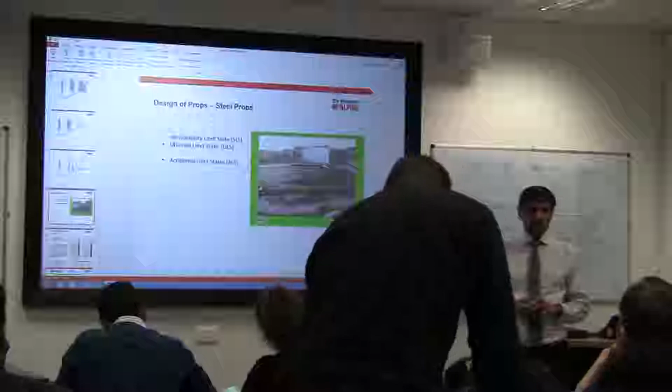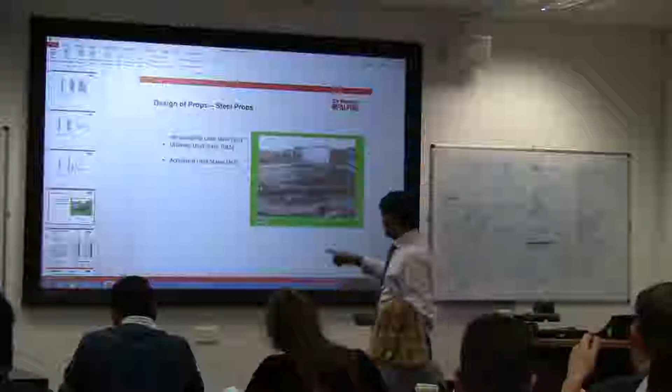That means how much this fly-through prop is going to sag. Let's say this is going from one end to the other, about 35 meters. Imagine you've got a tube held at two points, 35 meters long. It's going to deflect by its own weight, self-weight.

The self-weight deflection of that prop is going to pull the walls in, because if you've got a basement of, let's say, 40 meters by 40 meters, and you put a fly-through prop like this, that's the plan. So that prop, supported by a capping beam there and there, is like a simply supported beam.

Under the self-weight itself, it will sag. So what happens to that deflection? When that prop deflects, it will pull the walls in. So you've got to think, what happens to the serviceability state during construction of that prop? What is the self-weight deflection? That prop is roughly about a ton per meter, so a 40-ton beam is standing.

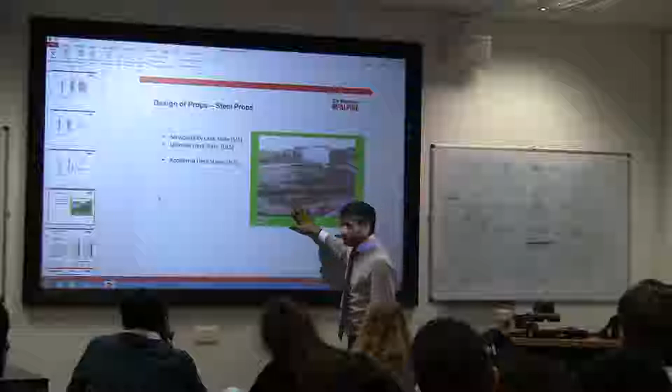When you install it, the ground is there, and you're going to dig underneath it. Once you dig, it starts to deflect by its own weight, and once it deflects, it will pull the walls in. So serviceability limit state is about what is the deflection of that prop.

If a fly-through prop is very large, what we do is we jack it up, so we hold it up. When we install it, we hold it and put it up like that. When we release it, when we dig the ground, it comes flat. So there are two ways of controlling if the deflection is too large.

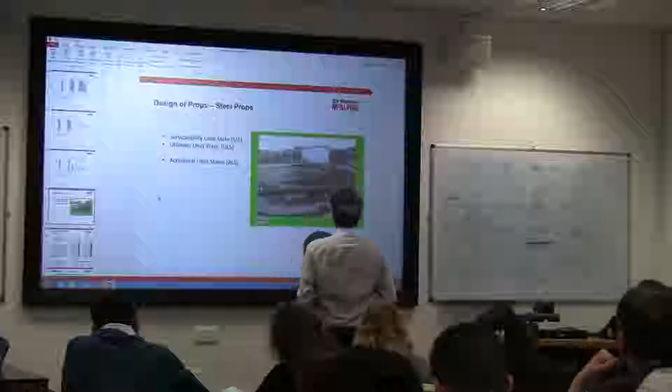And to realize the forces in this, it takes a bit of time, we know that. If it is gravel, you can see, as soon as you dig behind the wall, it will push - the forces act very quickly. If it is clay, it will take a bit of time to build up the forces at the back of the wall. So you have to think in terms of the development of the force with respect to your sequence of construction.

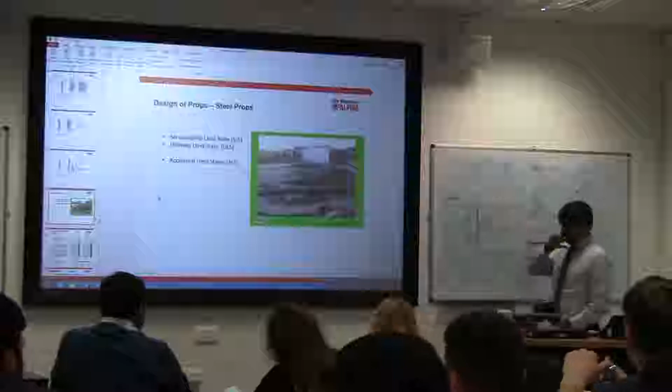So once the force is developed, we also look at the ultimate limit state scenario. That's based on the strength of the material, using material safety factors, load factors, and material factors. We work out what is the force, what is the utilization in these props, how much force is developed in the ultimate limit state. That gives you safety in terms of developing the forces.

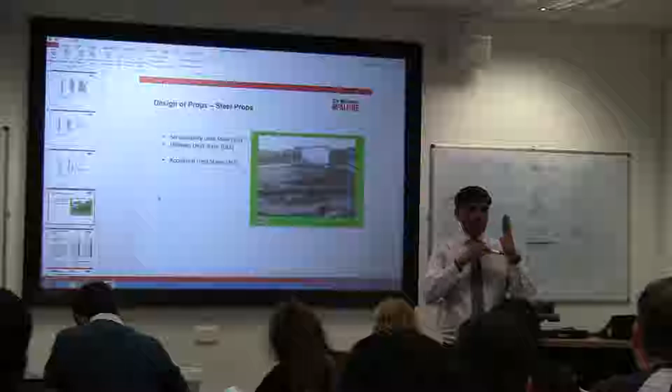Remember, the force in this prop is not developed on day one. It develops while you are digging slowly to the formation level. When you put it in, the force is only self-weight; when you start excavating, the force starts to develop, and it's going to compress this one - it's a strut, so it's a compression member.

You've got to think of buckling, and then make sure these props have allowable stresses - there is a margin of safety in terms of the forces.

So why are they circular props, do you think? Yeah, yeah, yeah, what else? What are the other reasons why it is circular props? Why not a big, massive concrete beam or something? Yep, same way. Yeah, yes. Good point. Any other reason?

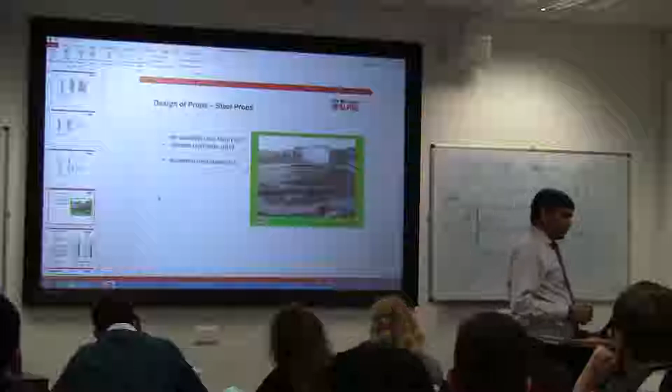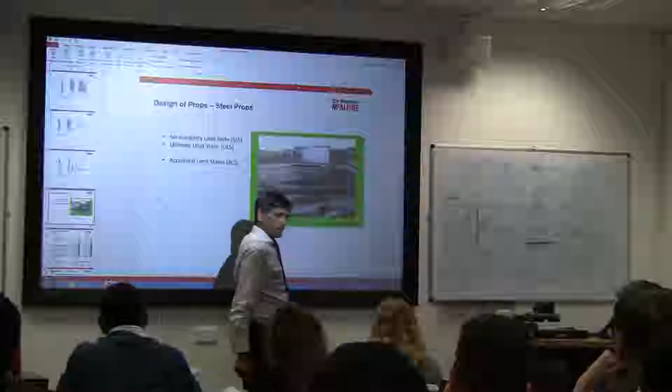In terms of fabrication, in terms of the splices, circular sections give us flexibility to bring the flanges to bolt it. So it's simple and safe to bolt on site. Imagine this is actually about 40 meters - you can see the splice there, the splice there. These splices are easy to install, and you can see clearly that the alignment is easy with circular props.

Also, why do we use sections that are not proprietary? It depends on what the program is. You can go to the market and buy or rent these props, but those props will have limited load. So you can say, oh, I'll buy it off the shelf.

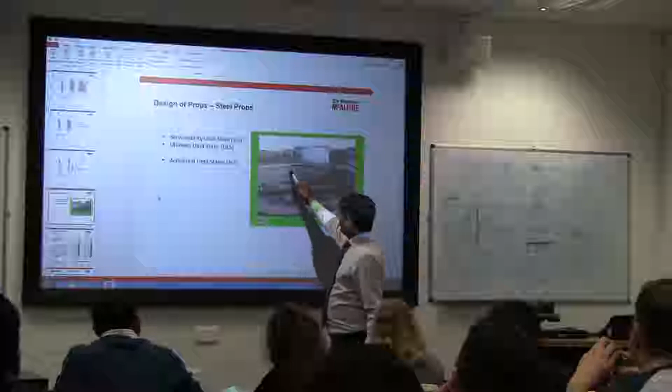I can take a prop which is nicely bolted to my capping beam or whatever waler. If you've got a steel waler, you can see here there is a capping beam, or you could have a steel waler if it's a steel beam. So you can bring in proprietary systems to bolt it and then use it.

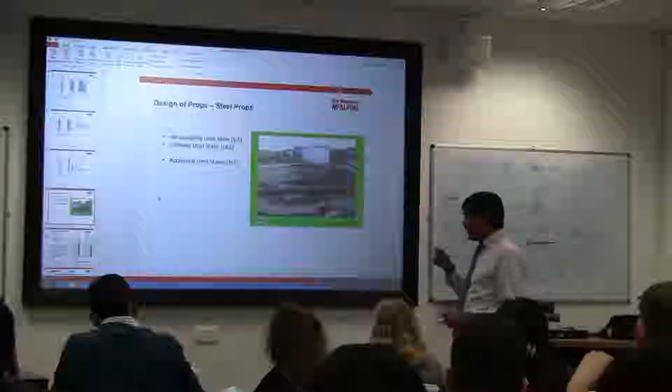If you do a cost analysis, the rent you pay for proprietary systems is very high. You might as well go for props that you can fabricate on site and reuse. Because we are contractors, we reuse the props again and again. That's sustainability—we don't just throw these things away. They go back onto the yard, and whenever there is another scheme, we reuse the props, cutting and modifying them to suit. That's the beauty of these props, when we make them specifically suited for our jobs.

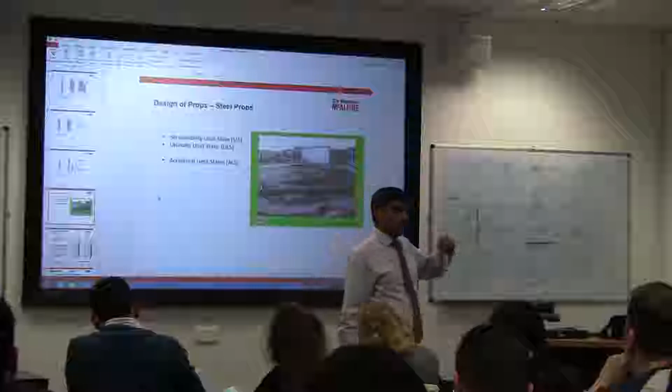Proprietary props also have limited capacity. In this one, the force we're talking about is about 2,000 tons. It's a massive force.

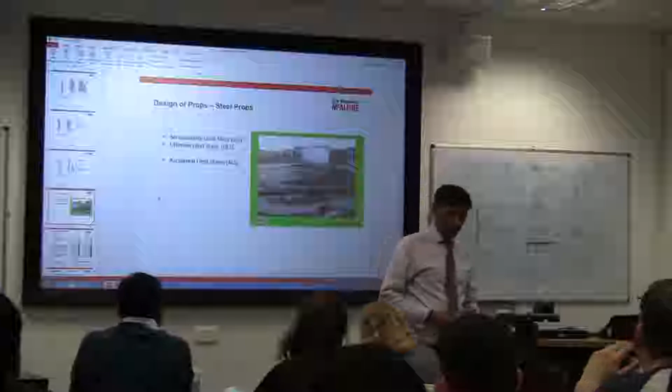What is the disadvantage in steel when you are digging in a blue sky scenario? What happens in summer? It gets really hot, yeah? In this particular scenario, we were working in a blue sky option next to King's Cross Station. This prop gets exposed, in summer, to something like 35 to 40 degrees.

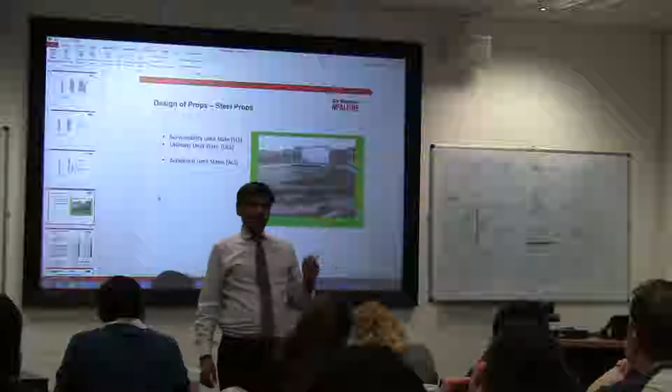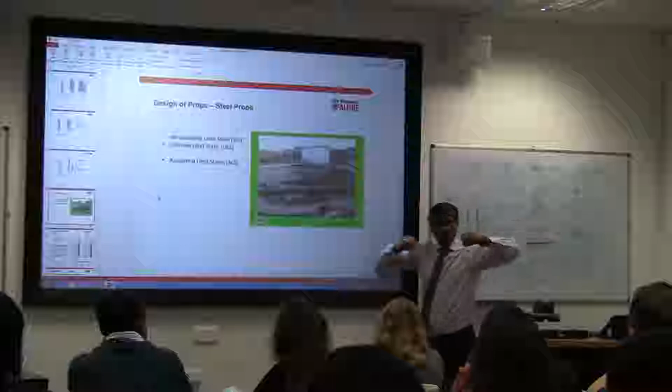So if you put a simple equation of a prop, imagine delta T is equal to 40 degrees, for a prop of length 40 meters. Your delta is equal to alpha T times length—that is your deformation or elongation of the prop. Alpha is the thermal coefficient of expansion for steel, T is the temperature. So you've got a circular prop of about 1.2 meter diameter, and for steel alpha is 12 into 10 to the power of minus 6. We talk about temperature roughly 40 degrees centigrade, with L being 40 meters. It's a huge force.

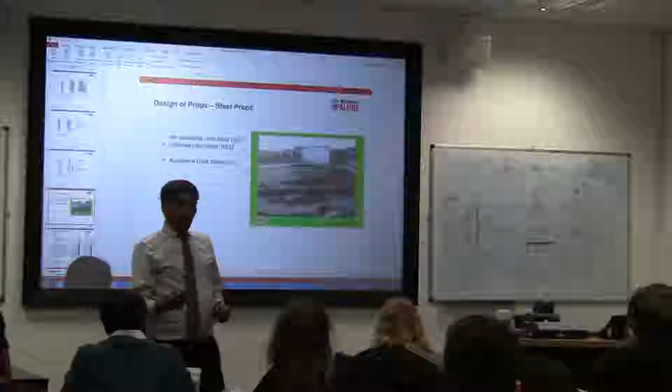When the excavation is going on in summer, the force is huge because of the temperature, restrained by this huge capping beam. So it develops extra force. Remember, it's not nice to freely expand—if you let it expand, it's fine, but you can't let it expand because it's held by those big, thick corbels at the end. So you are developing a huge force in the prop in summer.

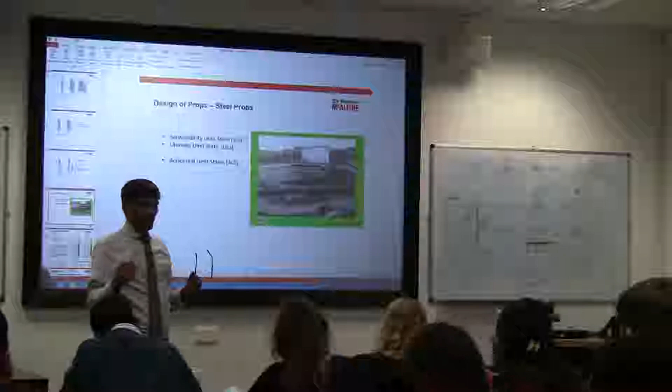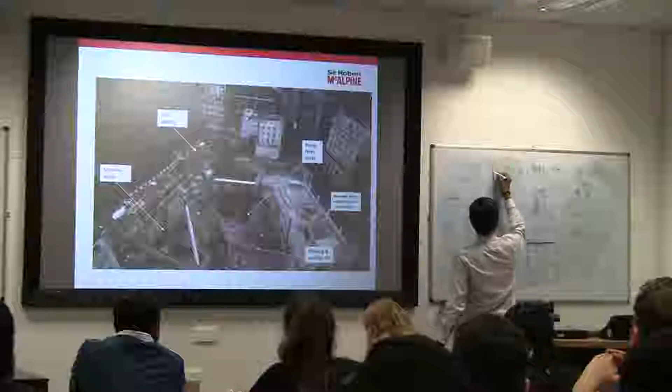Again, it's something we have to think about. One of the things you probably remember—you see what we have done there? You put insulation, because that force is massive and the prop is going to buckle. So what we did was put a lagging outside the prop.

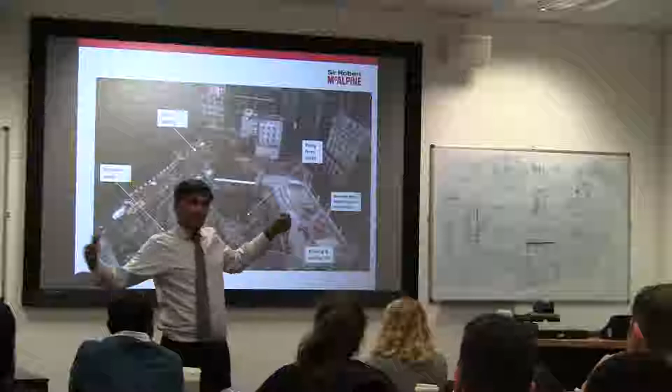To maintain the temperature so it doesn't see 40 degrees. This is again in London. Going through the construction sequence, almost 9 months, we will see hot summer periods, and we want to control the forces in those props. We lag them because they are the longest props on site—obviously, the longer the length, the huger the force development. But if you're short, it doesn't matter because it's very short. This is one of the largest props used in London, a 50-meter long prop.

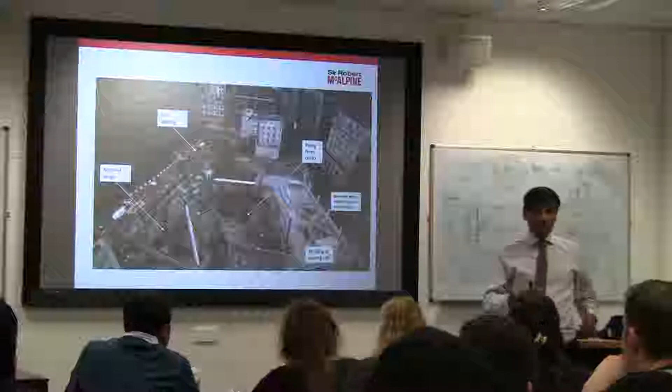You have to think, in terms of ultimate limit state, what temperature force is added onto the prop force. That component—do not underestimate it, it's very huge. If you let it go, it's fine, but if you can't let it go and it's all locked in here, the force will go up.

So the other one is about accidental limit state. What is this accidental limit state? Why should I worry about accidental limit state? Anybody heard about accidental limit state?

When you're holding back water, you may have a ship crash into your structure. I agree, you can have accidental loads. So what is the scenario you can think of here that can create an accident?

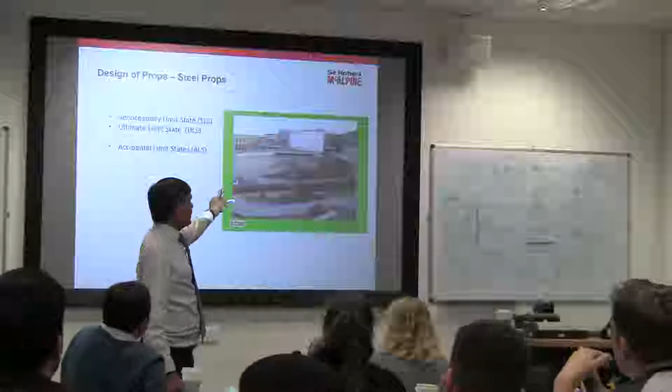Collisions, isn't it? Remember one of the sites I showed you, we have a big tower crane lifting 5 tons of steel, or maybe a cladding or a piece of brick, 1 or 2 tons. So accidentally, if it gets dropped on this, you've got to address what is the force in this and what is the redundancy in the system.

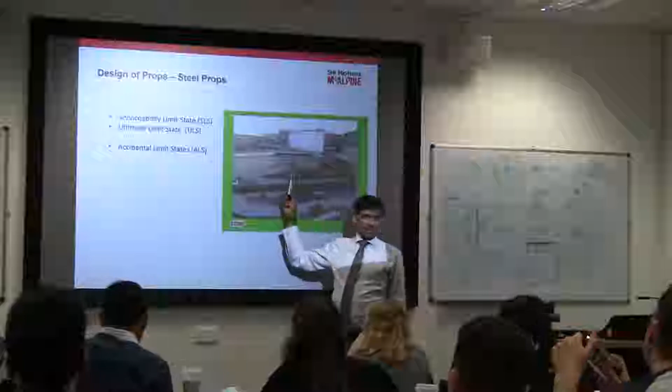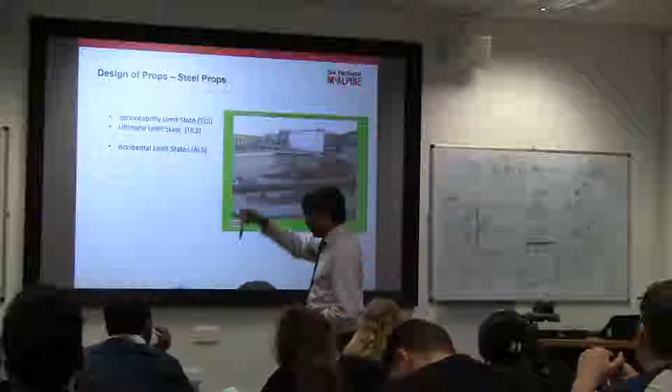Imagine if you've got a 50-meter long prop, and if you drop unfortunately 5 tons, which is 50 kilonewtons, you can see the bending moment dramatically goes up because the prop is long. For accidental impact, you have to think of dynamic impact factor, which is roughly about 2. So static load is 50 kilonewtons, but dynamic load is maybe 2 to 2.5 times that.

So the dynamic load factor times the static load is your force impact applied on top of the prop. In that scenario, you must ensure that there is enough redundancy in the system so the prop is not going to fail, because if that prop fails, the wall is going to come in. Once the wall comes in, there's no going back.

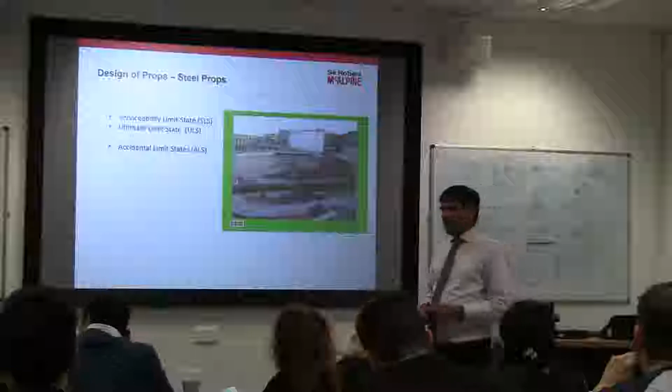So this is another thing that we have to demonstrate: for the props that you are putting, what is the accidental limit state scenario? If one prop fails, you have to imagine there is redundancy in the system. There have been major incidents in temporary works where one prop failed and it's like a pack of cards - everything collapsed.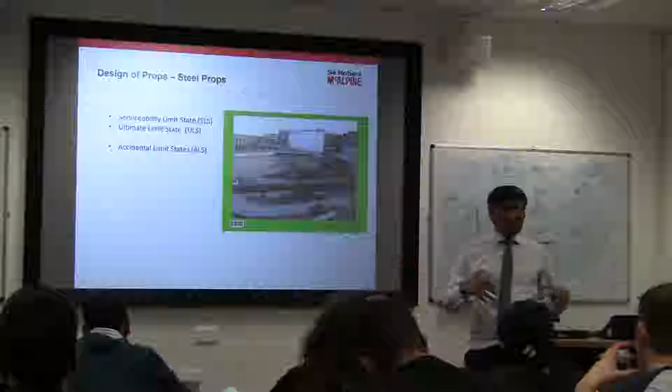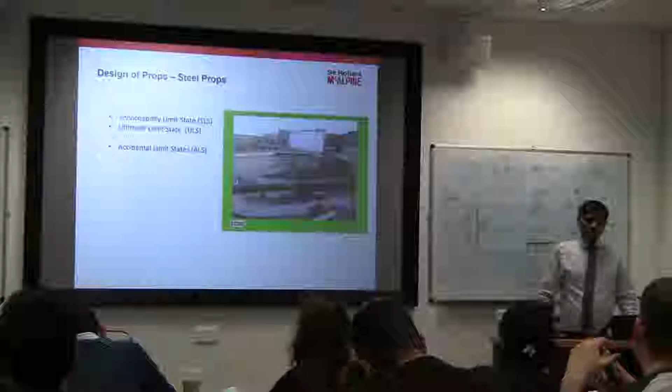And there is no going back, because once the walls moved in, the damage is already done - the whole thing came in. So it is important that you address the accidental limit state in these scenarios. It could be a drop of a concrete bucket, a brick tile, or a reinforcement block on those walls. You must ensure that the redundancy in the system is not compromised and there is enough resilience in the system.

I talked about monitoring. In order to ensure that our predictions are correct - remember in soil mechanics, the predictions are based on a certain number of boreholes, certain number of tests, triaxial tests, shear tests, all the tests that you do in classifying the soil and calculating the engineering parameters - you always get a range, as I was saying before.

You get what is called a lower bound solution, a most probable solution, and a worst credible scenario which can never happen. So those three give you a range of values. It is important that we monitor how the structure is behaving as you are digging, excavating, and building the structure.

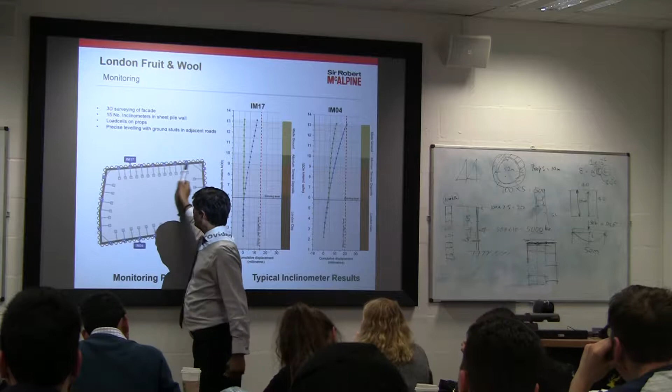So normally what we do is put in 3D surveying. If we've got a big facade, we use big monitoring of the facade to see how it's actually moving. This is a plan view of the excavation I showed you earlier - there's a 100-meter long facade here, and we put inclinometers in the tube. When you're driving even a secant pile, there's a hole of 150 millimeter diameter.

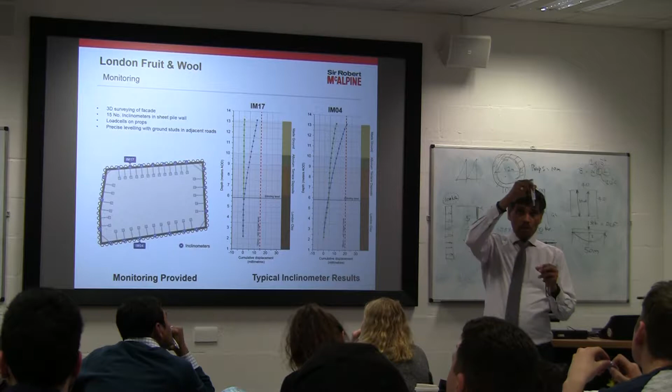You drop a tube in there, and within that tube you monitor by using a small torpedo. It gives you a measurement of how the wall is doing. So we use what is called inclinometers at various regular intervals. When you're doing the sheet pile, at the back of it you weld the tube and drive it in. So if you weld a tube there and drop a torpedo in it, it will measure how the wall is moving.

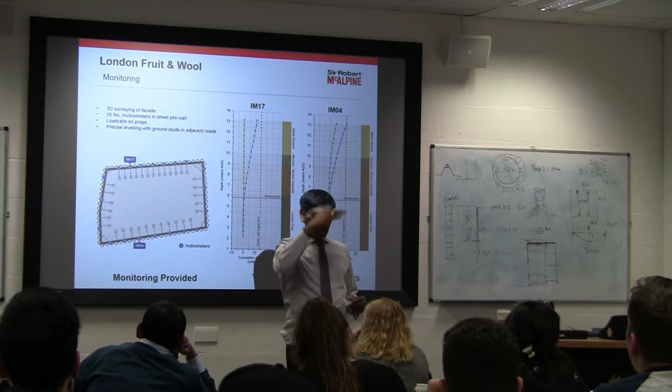As we go down, that inclinometer is used, and then we use load cells on the props. When you're installing the bracing prop, as I was saying before, you can put a load cell on both ends or one end so you can measure what is the load on the prop. And if you've got services - in this particular case it's surrounded by roads, we've got the Thames water main, we've got a gas main here - so on the pavements and roads we put in leveling studs to see how the settlements are happening on the ground, just outside our boundary.

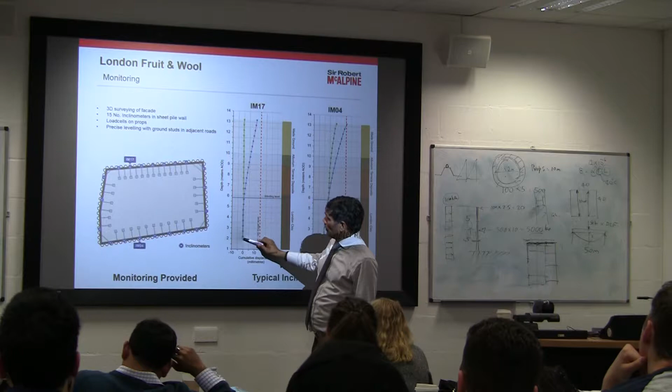This shows clearly, if you take a typical inclinometer - this is monitor 17, an actual raking prop - you can see how the wall is moving at various stages of construction. This shows how the wall moved as we started to excavate, and you can see the point of zero or contraflexure is well below the formation level. This is the formation level. So the wall is not moving here, more or less roughly fixed at this point, and then it starts to move, which is what you'd expect.

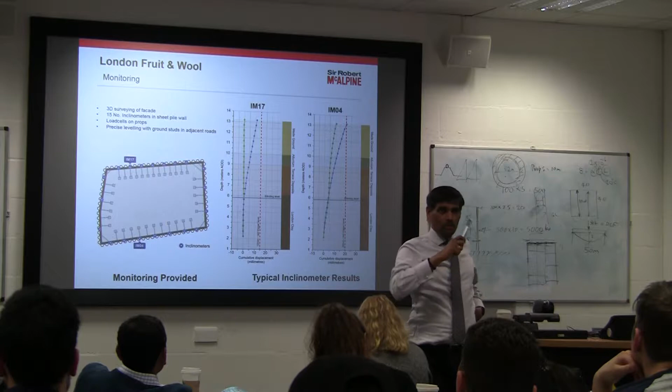You can see a bit of rotation there, which is what we talked about the other day - how we relate the volume loss or the movement or change in strains into the settlement contours of the ground. So if that moves, the ground here also differs like that. You can relate that to the ground settlements in that diagram.

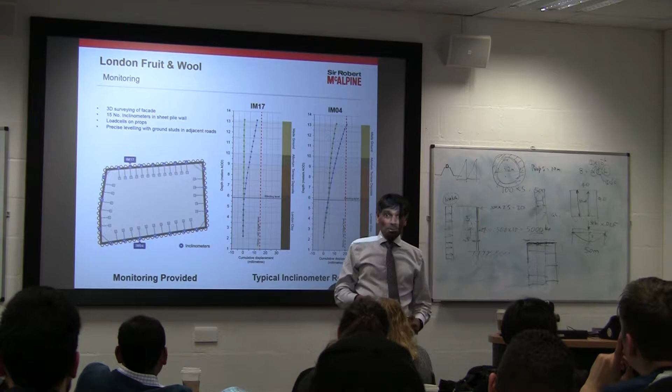This is another inclinometer reading. You can see here, even though we think it is fixed, it's moved a couple of millimeters - almost at this point something like 5 millimeters. So that's happening in the ground where you haven't dug. We've only dug here, but the movements are still happening.

4 or 5 millimeters. So what that means is, if this number is significant, you need to reflect that back into the ground. If this is moving below that, your influence area outside the footprint of the building is also changing. So what I mean is, if you don't have enough fixity of the wall - imagine this is a 40 meter by 40 meter construction.

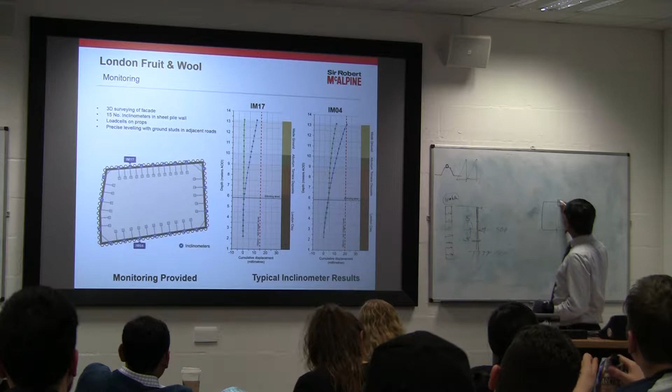That's the plan, and if you take a slice through there - if this is the formation, and the wall is moving below the formation, it means the ground settlements are influenced by the same dimension on this side. That makes sense, because the volume loss has to be the same. If the fixity point is here, the influence of the ground outside the perimeter of the building is limited to what you are digging.

If you put a very shallow one, you don't know, but this point is moving. If that point moves 10 millimeters, let's say if this is 10 meters and this is 5, that means 15 meters at the back on the side, the ground actually starts to move like that - so that is actually 15 meters. Who would think that you're digging 10 meters and 15 meters down there? They can see what is moving and they can put a claim on it.

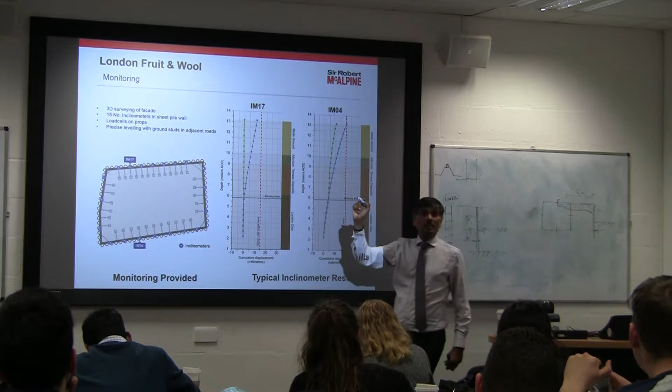So the contractor has to address these issues - what is the movement of the toe of the wall? We think the toe is nearly fixed, that's fine. But in some cases the clay is so flexible that its stiffness varies dramatically depending on the strain levels. If the strain levels are large, it starts to move, so the toe movements are also related to your ground movements - you've got to be careful about the influence zone outside the boundary of your site.

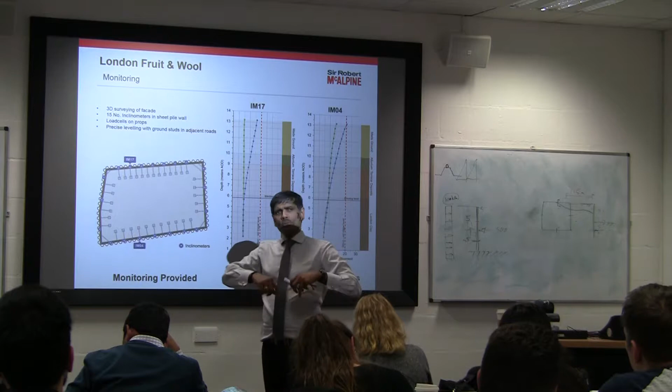So you have to do the risk assessment of all those. In plan, say you are digging 5 meters, so you think the influence zone is only 5 meters, and you do the risk assessment of all the structures and buildings within that zone. But if the toe keeps moving, your influence zone changes - you've got to bring in more buildings within the properties, do risk assessments, submit those to all the third party owners, whoever owns those buildings, and ensure that whatever operations you're doing aren't damaging them.

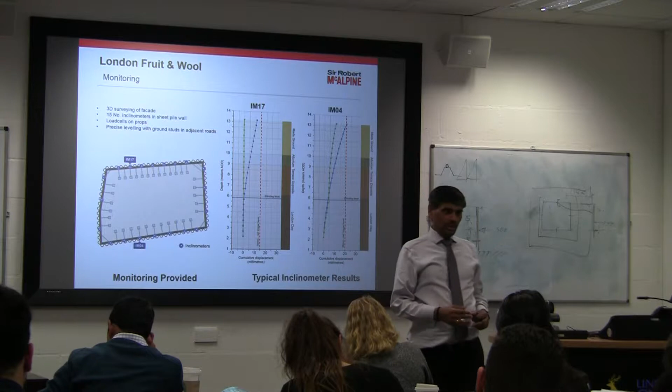So it's very important that we monitor this as we dig and keep what is called a sort of control - how do we actually control this? It's fine that we keep monitoring, but what do we do after we've got the data?

So this is one example where we measured the loads and compared, because we put the jack on the raking prop. The jack actually picks up the force as we go down, as we dig down. So it actually tells you what we predicted, actual load versus design load. In various soil conditions, we're getting roughly about 80%.

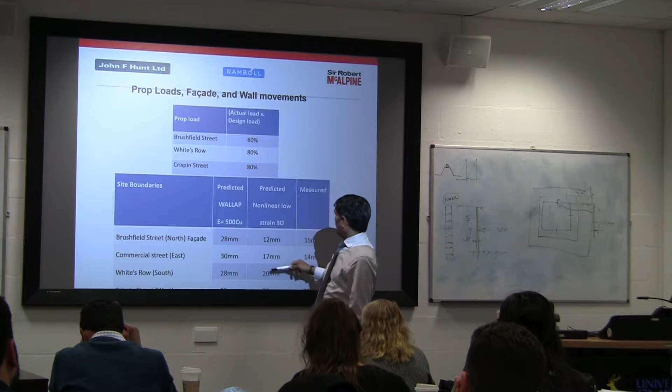In terms of predicted movements, we do various types of analysis. One is WALLAP, which is a beam on elastic foundation approach, and we use a non-linear low strain 3D modulus. We get some better control, better measurements, and that's what we measured.

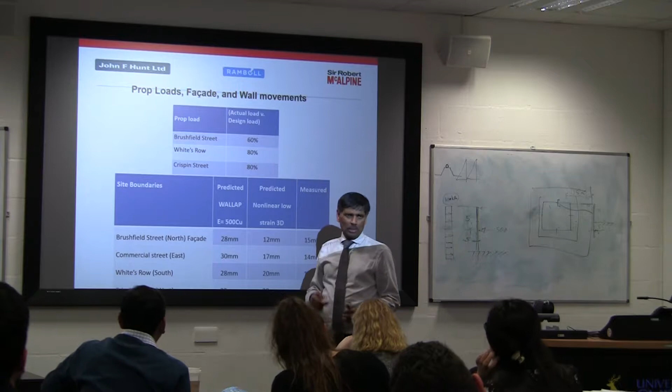So you can see WALLAP generally gives you a better estimate, a safe, conservative estimate. If you go for a non-linear analysis, because the clay is highly non-linear depending on the plasticity and the strain levels in the clay, if you bring that into the model with a detailed finite element analysis, you can improve the figures in terms of your predictions. What we actually measure is, that's a good name.

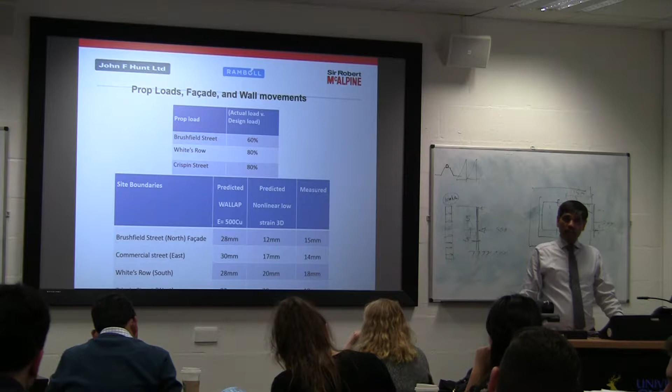Again, the variation of the stiffness is very high for certain soils, and we need to be aware of that.

We talked about props, and sometimes it may not be possible to put the props, either fly-through or raking props. So we come up with something called ground anchors. We drill the ground, push a big hole in there, put a stressing rod, grout at the end, and then close it. So we basically stress it.

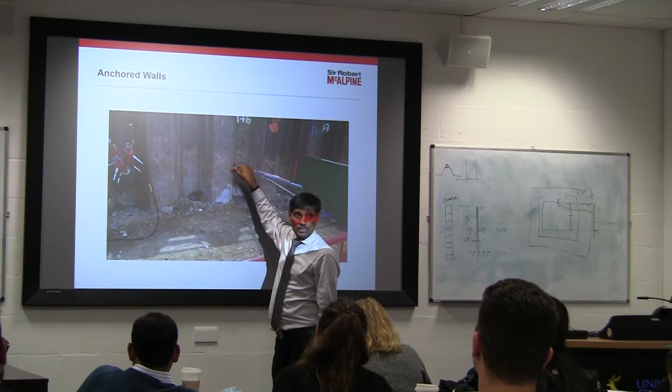In section, how it will look is, so we can't put the props into the site, it has to be free. If you're digging to that level, let's say 10 meters, that's the sheet pile we've done. We drop the ground about a couple of meters and put the ground anchor in there, and then grout it here. So that is all held in nice stiff soil. Obviously you can't put it in loose soils. Whatever force is coming here has to be bonded by concrete into the soil. So you lock it here, and that way this space is free.

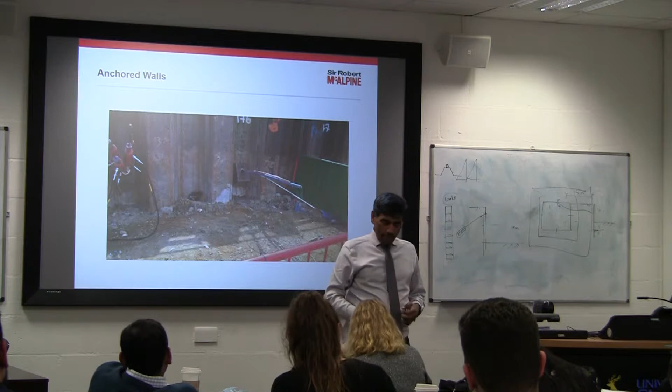So why can't I use ground anchors everywhere else? Loads, yeah, that's one of the reasons. Will you allow ground anchors to go below your building if I am digging next door? That's the reason we can't put ground anchors next door, because that area where you've got buildings or a highway, nobody will allow it unless you own the site. Although you're going very deep, they won't allow you to dig under their building and put the ground anchor.

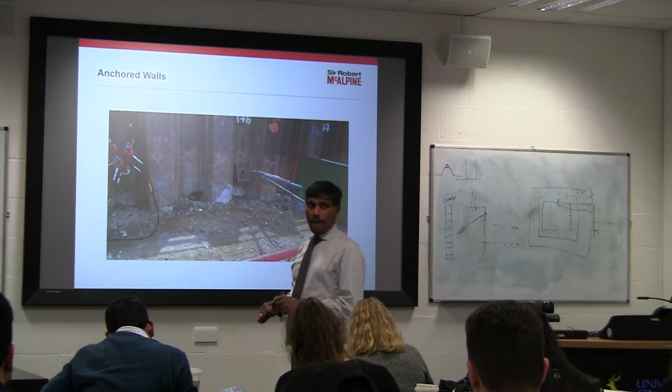What is the other disadvantage of the ground anchor? Let's say the client owns the site, why can't I put ground anchors? What's the disadvantage of this? As you said, the loads are very large, so you need lots of anchors. You can see the spacing of these anchors is hardly a few spans, it's very closely spaced. The spacing here is about 500, and you can see these anchors are spaced about 2.5 meters, very closely spaced.

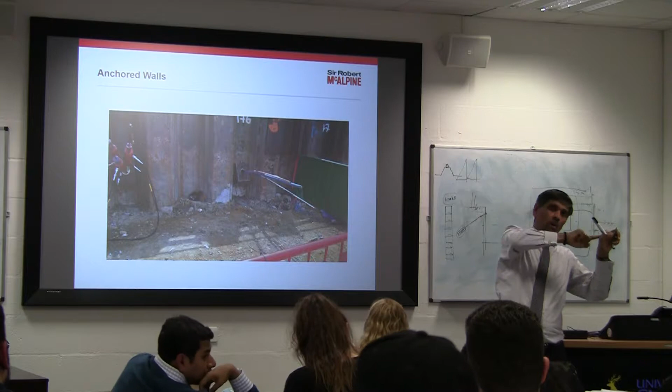But the anchors take limited load, and that limited load is based on the bond at the end. If that material is not good, it will come off. So it's limited by what is carried by the bond at the end. That's the force that's holding it. And you're not sure how much grout has gone, how much it's holding, unless you test it. So you've got to test it and so on.

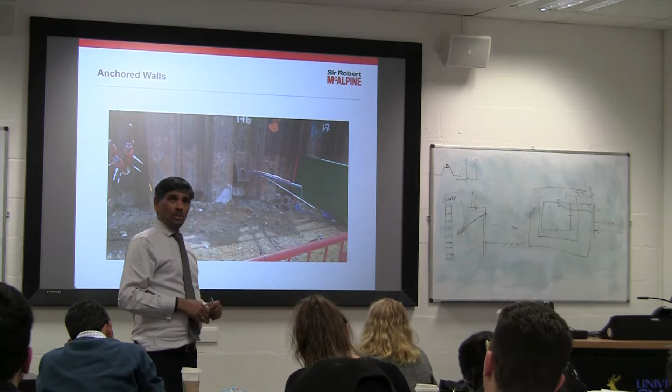What is the other disadvantage with this? Suppose there's a break, somebody accidentally digging behind, although it's your site, if you put it very close and somebody accidentally hits it, it breaks, and then you have an issue. So although you own the property, you've got to address what the scenario is in terms of accident. Are they temporary or permanent? In this case they're mostly temporary, because if you're using them as a permanent condition, there's a clause that you must prove they are not damaged by any means.

So if you're using them for permanent purposes, you have to do a risk assessment. You have to ensure that for 60 years it's going to stay in the ground. Somebody coming next door will not know that there are ground anchors there; they will simply start digging. So that risk is there. You've got to ensure, if you're using them for a permanent condition, how do you ensure the neighbor will not come and build another basement here?

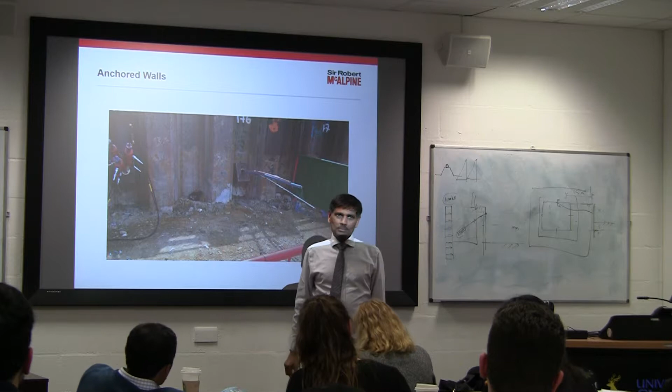At some stage in the life of the building - remember, the building life is 60 years, 120 years - the accidental condition of the ground anchors, even during temporary condition, we have to demonstrate that we are not losing the stability of this wall. Remember, we have already exposed the wall here. If that ground anchor is broken, this wall is going to come in. Once it comes in, there is nothing that can stop it.

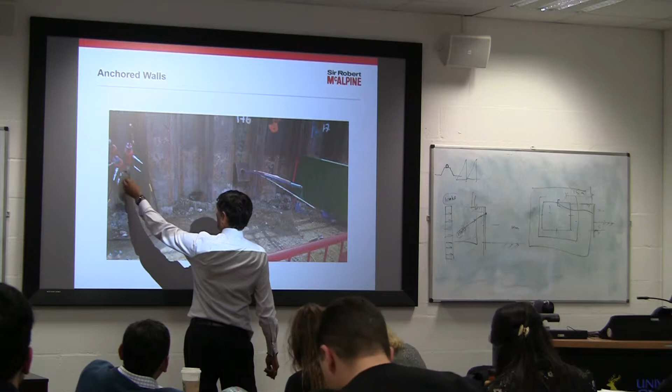You can see the strand that is being jacked here is a pre-stress wire that you put in, you pour the concrete, and so you stretch it and lock it. Then you lock it on the template here, so the force is held there. You need to ensure that force is constantly held there. If you lose that force, the wall is going to move.

So that's another ground anchor system. We do use it sometimes, if we know exactly what we are operating on, in the temporary conditions. We also ensure that we are putting a demarcation zone, so no machine can go and damage these things. You got to put what is called exclusion zones where the ground anchors are. You will see most of the ground anchors are used in big retaining walls and marine structures. So sometimes you get a footprint of those things, what is being used.

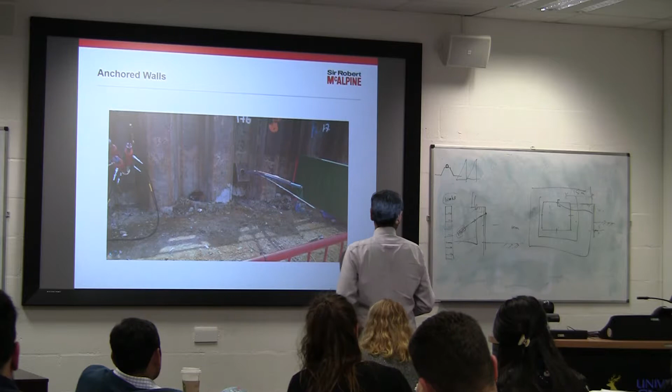Sometimes we use them multi-level. So you may go here, put another ground anchor, very deep one. You go to the next one, put a very deep one, so they are very long. You got to have a multi-stage. We are doing this in one of the jobs where we are putting 5 levels of ground anchors to hold the wall. They are closely spaced, very closely spaced, and made very long as they go in, ensuring that none of these gets damaged while we are excavating here.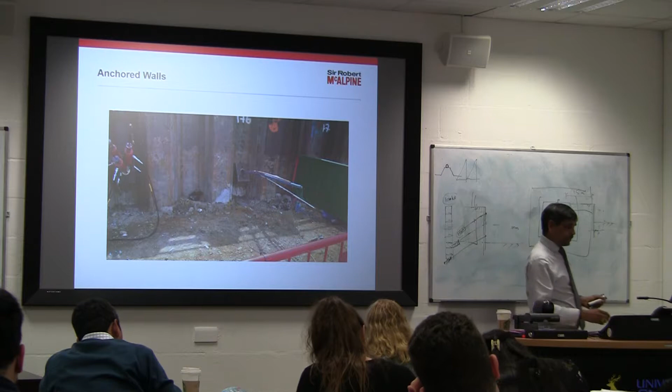So ground anchors is another way of holding it instead of prop. If you can use the ground anchors, the thing is about limited capacity, damage criteria, and what soils it is going to develop the bond that gives you the force to hold things.

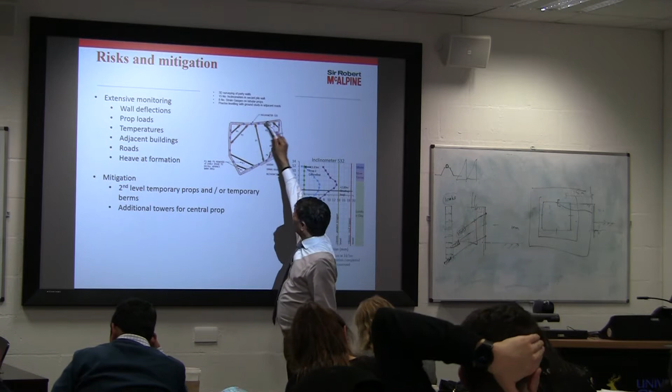So this is another one where you can see the prop. This is the longest prop we talked about, a 50-meter long prop. This is a diagonal prop, so that's the capping beam. You can look at the offset here. So we were measuring wall deflections, we were measuring prop loads, we were measuring temperatures, we were also measuring all adjacent buildings and the roads, and also the heave at the formation.

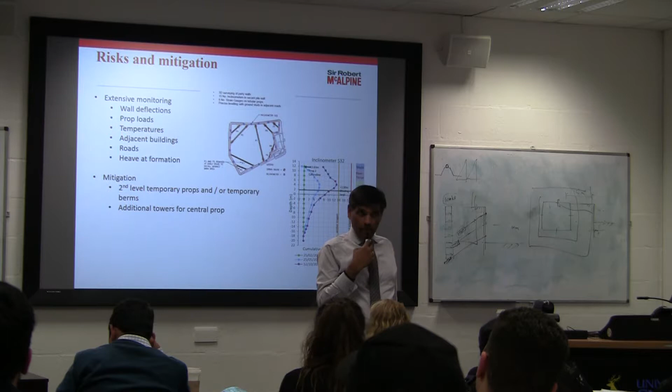Yeah, absolutely right. So what happens is if you go back to the scenario of deep basements, not very shallow basements - that's the formation level, this is the secant wall, that's the ground level, that's your original ground level. Now what have we done to the soil there? So sigma V, before you start digging, this is 20 meters, so gamma H is equal to 20 times 20, assume total pressure, 400 kilopascal. That's the vertical pressure on the soil particle. By digging, what have you done? You made sigma V equal to 0. So what happens to the bulk modulus of that? The ground is going to heave. If that ground is going to heave, this also going to come up.

So behind the wall, remember, this is the center of the excavation, that's the maximum in the center. So if you got a plan view of 40 meters by 40 meters, the settlement and heave contours will go like that, because that's the maximum. Then it goes to the end, it gets less, and then it changes the curvature. Because of that, the ground also heaves, so if you got a pipe there, that also comes up.

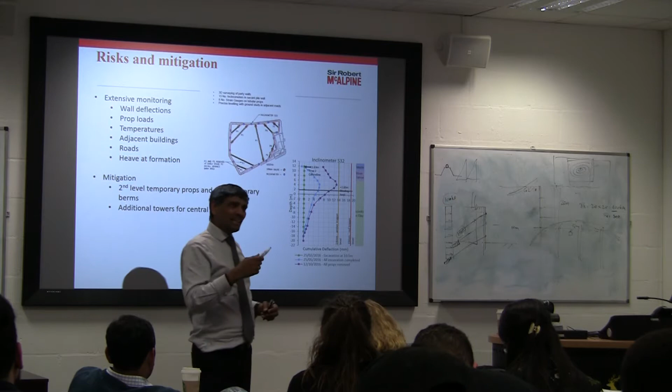You've got to think what is the net pressure going to push my slab. So whatever the base slab you have applied is going to push that base slab. Yeah, when your piles work in tension, absolutely right. Yes, the piles will start working in tension. That is why it's important to see whether the load balancing is being done by the new building. Yes, piles will absolutely go in tension. That's why you have to ensure the cage is there, and your slab is also subject to pressure.

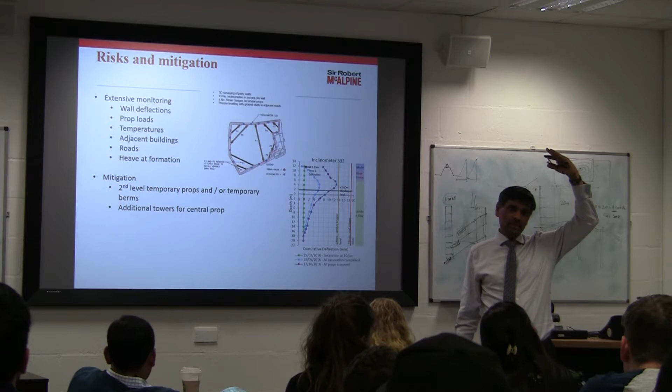So how do I relieve that pressure? If the residual pressure is very high, my slab is going to be 1 meter or 2 meters thick. What do I do? How do I release it, how do I reduce my 2 meter thickness? So let's say, for argument's sake, if the difference is 100 kilopascals, that means I have to put almost a 4 meter thick slab to hold it down to just 0. A 4 meter thick slab is equal to 100 kilopascals of pressure. So I need a 4 meter thick slab to balance the load so that my heave pressures are countered by the dead weight.

So is that practical, to put 4 meters thick, as thick as this? So how do I deal with that? What do I do to reduce those things? Anybody think? Water? Yeah, where will you put the water? In the basement, the swimming pool.

You can put a counterweight, but again you're occupying space, right? You can't really put a counterweight. So if you say I put some counterweights here to hold it down, because the heave is pushing the slab out. Any other ideas? No? Okay.

So if the heave pressures are very large, that is the slab. So we talked about tension piles here because it's subjected to upward pressure, which is the net long-term residual heave acting. That's your ground level, that's the formation level. We put a reasonable thickness, but the slab is subjected to this pressure between the piles, which are actually acting in tension.

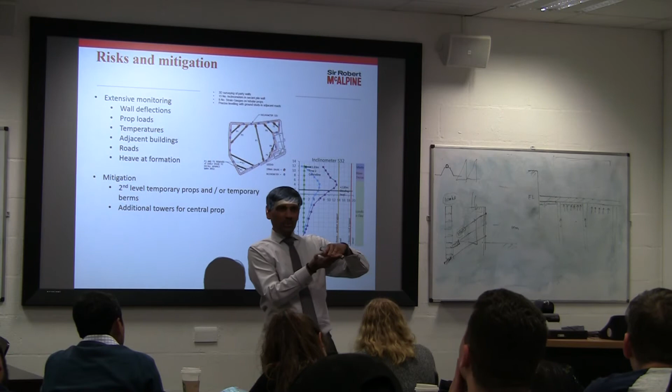So to reduce this, what we do, yeah? It's like a gap between the ground and the slab and stuff. So what is that gap? So what we do here, we put a compressible material. It's a filler. Basically the heave squashes that board and doesn't apply the pressure on the slab. So this is basically a compressible fill.

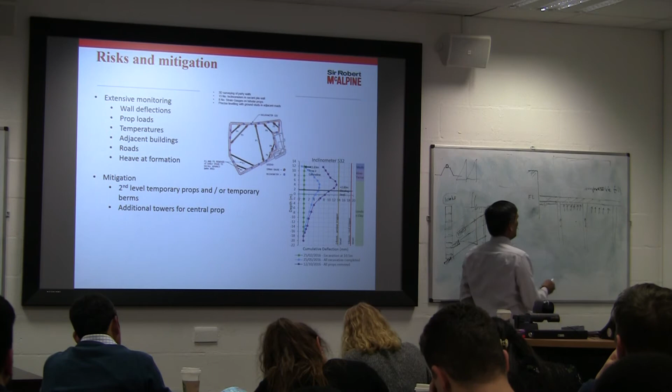So we estimate how much it is going to compress in the long term. We lay the board and then we pour concrete. Number one. Number two, you can leave a gap. Physically it is very difficult to leave a gap because what happens is, if I am leaving a gap, how do I cast that concrete? I have to put the shutter, right?

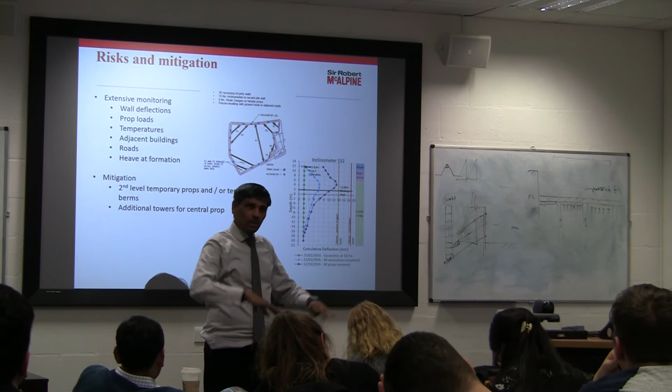To pour that concrete, so I can't pull out the shutter. So what we do is we lay a very soft board, about that thick, generally 100 to 150 millimeters. We lay that on the ground and then pour concrete on top of it. When the heave pressure comes, it squashes, it doesn't transfer the load onto this, but the piles are still subject to tension. So that's another thing we use to control the heave.

So it's important when you go into a deep basement, you measure what the heave is and predict based on what is happening in the short term. Because we dig about 16 meters here, maximum heave is happening here, and then towards the edges it will be controlled.

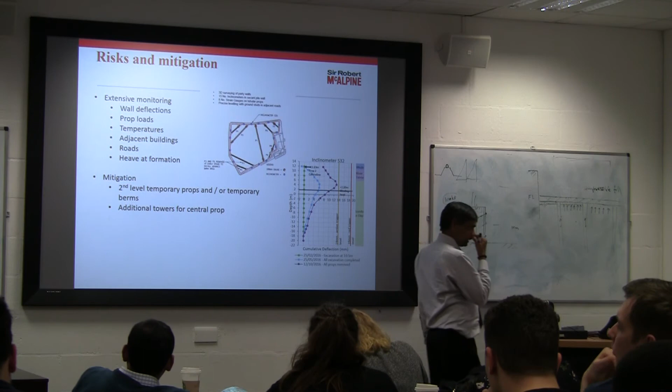So this particular one again we put the inclinometers. You can see the inclinometers, we got so you can see the readings here, and that's one level prop. You can see the final shape of the wall is, and below the ground, so almost 20 meters below the ground, the wall is still moving.

So if you reverse this one, the influence zone of this structure is almost 20 meters down, because the toe, you can see the toe is moving as well. Not a lot, but it is still moving. In terms of the scale, you can see this, if that's 4 millimeters, that's the maximum at the formation level, so average is about 2 millimeters moving. Sometimes that could still be critical for some of the structures within the influence boundary.

So again, you can see the classification of the soil, the clay, and the moments. So what we have here is a sort of mitigation. We talked about the observation. So we measure, we dig, we measure, and then we dig.

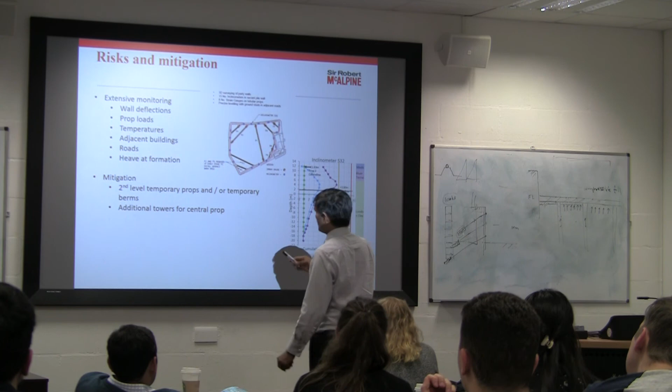Now, when we actually come to a situation where we are getting some early warnings here, the wall is moving more than what we are predicting, so what do you do? Because obviously, once it moves, there is nothing you can do. It's irreversible. So, in the observational approach, you must allow for a second level of contingency propping.

So, if you drop the ground from your current level to this level, you measure it, you predicted something, you measure it, and it's coming within the limits you predicted, it's fine. If it is moving more, you must introduce another level of prop here. So you need to be ready with contingency propping.

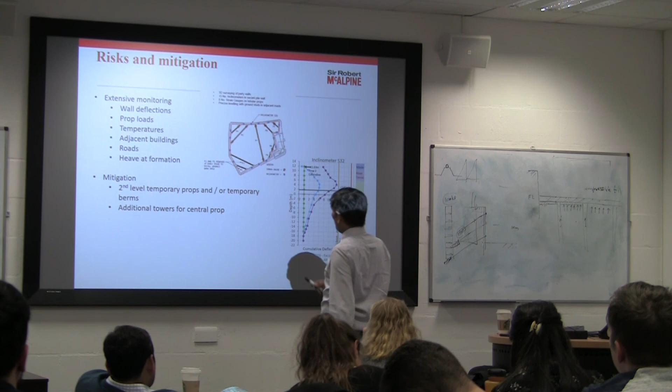So this is where you demonstrate to the third party owners or stakeholders that, look, I'm dropping the ground, but I'm observing, and I have got something in store that if it moves, I mobilize it immediately. You have to mobilize it very quickly to put the waler and another level of prop here. So this is only one level. If this had moved more than what we predicted, we'd have to introduce a big waler that goes all around, and then introduce a prop, again a similar pattern of props. So that's contingency propping.

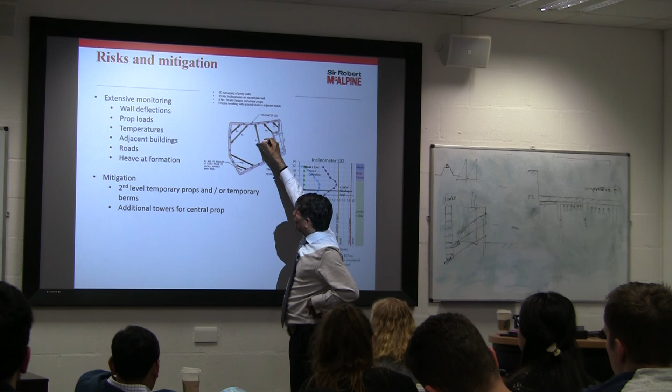And then sometimes we may have to control by additional towers for the central prop. For example, for that prop, because that's the longest prop, if it starts to move, we have to think of constructing a tower from bottom up to hold the prop. Obviously, if you decrease the length of the strut by half, your buckling load is 4 times, because of L squared.

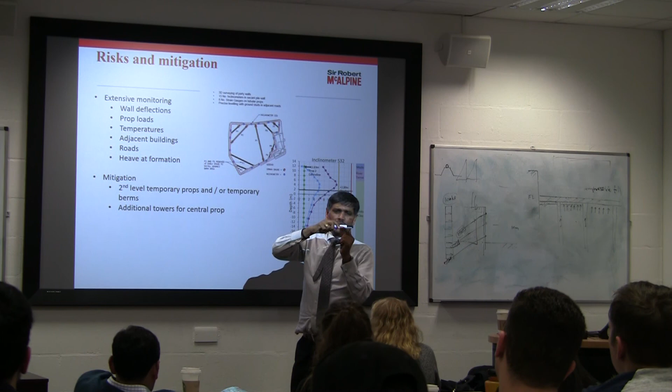So what happens is, if this is 50 meters, if this started to move, I would have introduced a tower here to hold the prop. So it's like a tower for the prop. Instead of a free length of 50 meters, I'm actually cutting that down to 25 meters. My buckling load in this...